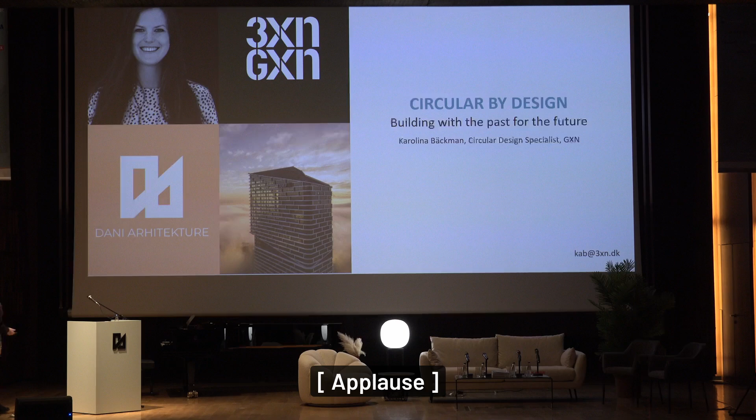And thank you for having me in this beautiful city. It's really nice and it's fantastic to be here as part of this discussion on the very important topic of reuse. My name is Karolina Bäckman. I'm a circular design specialist, but also a schooled architect, and I work for GXN.

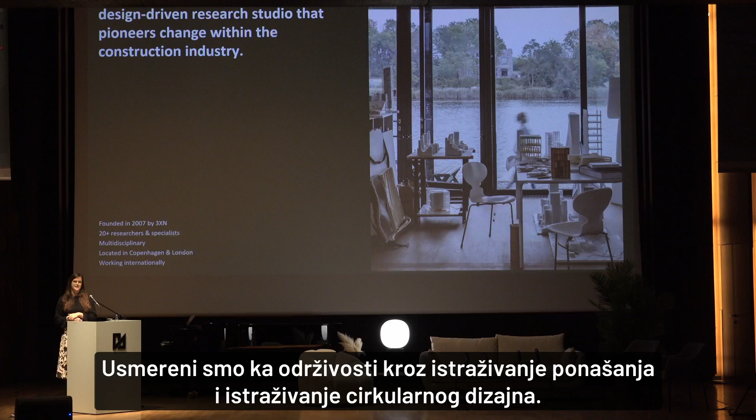GXN is an independent design-driven research studio. We focus on sustainability through both behavioral design research and also circular design research. We have been around for about 15 years. We were founded as part of an architecture company called 3XN, and then we have now spun out in the last few years as an independent company. But we have a very close relationship with 3XN. So we sit under the same roof in this beautiful building in Copenhagen, and together with 3XN, we then explore how we can create unique solutions for very complex problems.

We do this with our offices in Copenhagen, Stockholm, New York, Sydney, London, and Amsterdam, and we work on projects all over the world. What we have, which is very unique, is that we have a collaboration that allows us to do both research and then apply it in practice. So at GXN, we say that we are the geeks, we're the nerds. We do about 40% of our work as research, funded from lots of different institutions. And then about 60% of our work is as sustainability consultants on projects that 3XN is involved in or that other architecture practices are involved in.

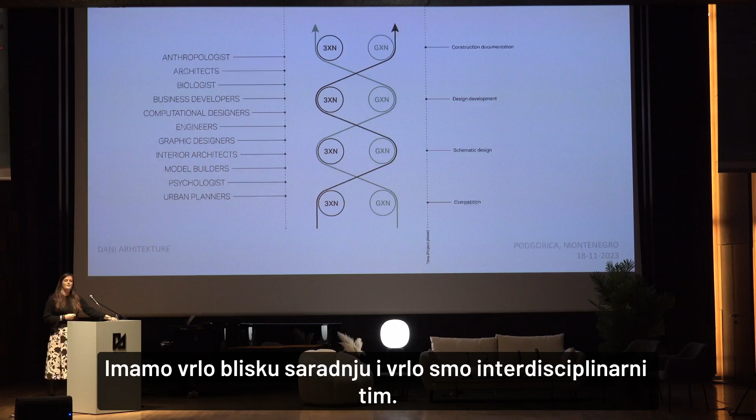So we have this very close collaboration, and we're a very interdisciplinary team. So we work in this flow where we share ideas back and forth throughout all design stages. And we do this on lots of different scales, everything from master plan scales and urban planning down to very much material science. And one of the big areas that we have really been geeking into in the last 15 years is circular design.

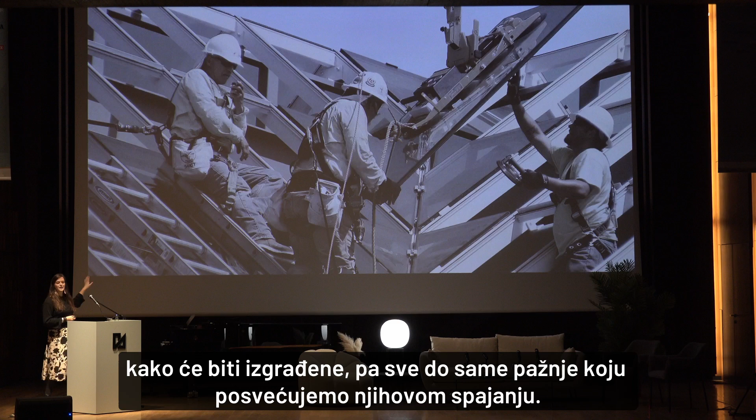What this comes from is really that we're fascinated that when we construct buildings, we take so much care in actually putting them together, both in terms of the energy that goes in from whole design teams to actually design them, plan for how they're going to be constructed, to the very care that we put into actually putting them together. But when it comes to the end of life of buildings, we seem to take absolutely zero care. They just go into a pile and they become waste. And why is it that we waste all of this value and energy that has gone into buildings?

So we did a lot of research on this, and in 2016 we published a book that was called Building a Circular Future, that was looking into how we can actually change this and continue the value of the buildings that we put together. It's still available, you can find it for free online. It's been updated in 2018. And it kind of outlines the basic principles of how we move towards a more circular future. And what we have done since then is looking into how we can apply that in practice.

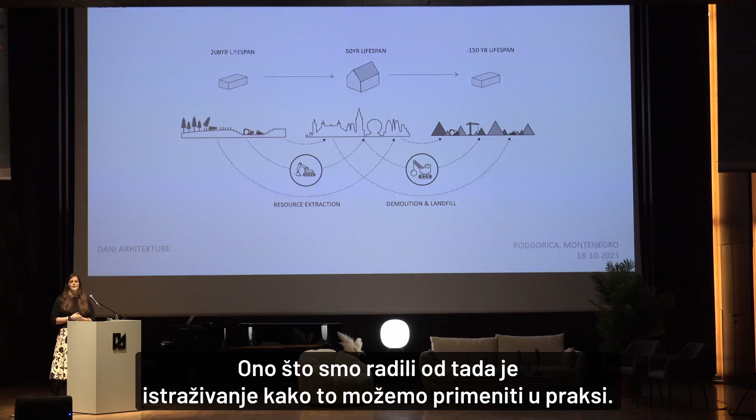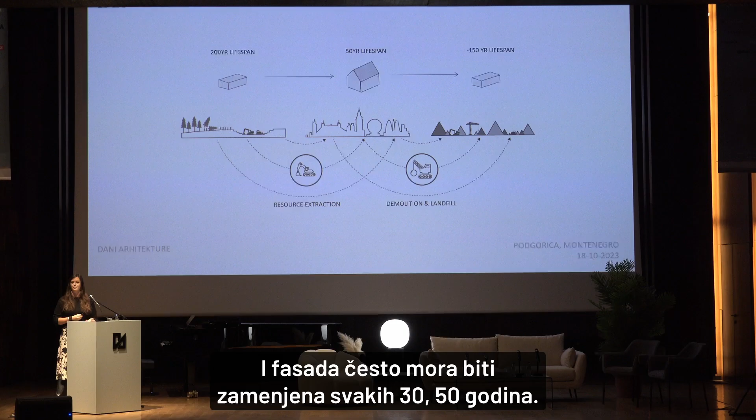So what we really see is that what we're doing at the moment mainly is a linear construction that results in a lot of waste. We extract resources and create building materials like a brick, which should have a technical lifespan of about 200 years. There's brick buildings out there that have been around for much longer than that. But we put them into a building in, say, a facade. And a facade often needs to get replaced every 30, 50 years, which means that the technical lifespan of that brick gets linked to the lifespan of that facade, and suddenly becomes much shorter. At the end of the life of that building or that facade, we then throw that out, which means that we wasted 150 years of a functional lifespan of that brick.

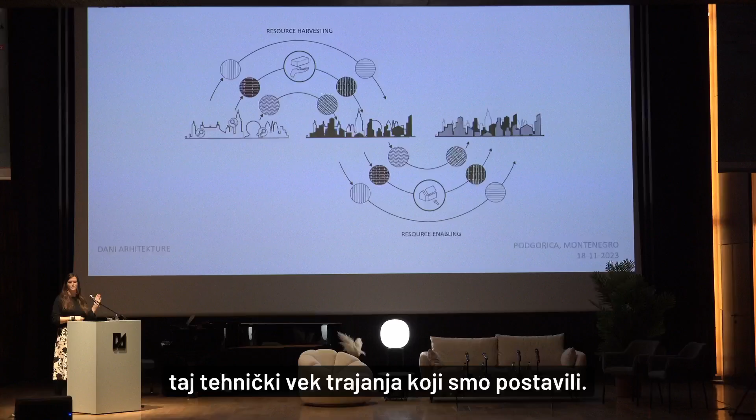What we think we should be doing instead is really looking at how we can harvest resources from the existing environment, making sure that we make the most use of that technical lifespan that we have put in, and then also enable those resources to be harvested in the future as well.

And we think this creates a circular construction economy where we have a constant flow of resources that can either be harvested from existing buildings that might need to change use or have come to the end of life, and then that we design buildings in a way so that we can also then reuse the resources in them in the future. And this is what I'm going to talk about now.

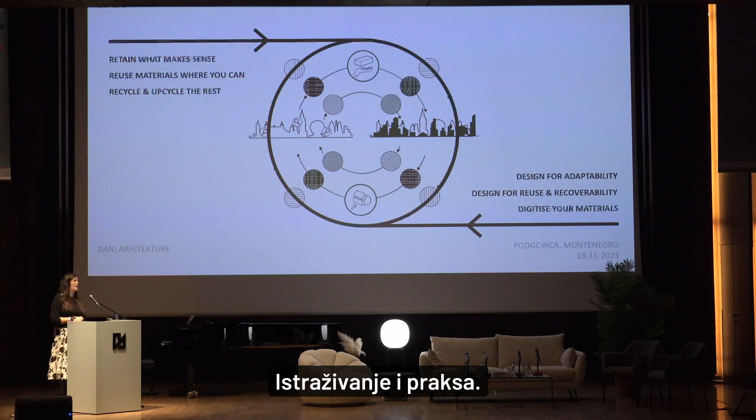Really what I want to show you is a bit behind the scenes of how we work with this, both in research and in practice. And we'll focus on these 6 key points that is the mantra that we apply to all of our projects, which is really about retain what makes sense, reuse materials where you can, and then recycle and upcycle the rest.

Then when we design new buildings, that we design them for change, we design them for reuse and recoverability of materials, and then that we digitize materials will make all of this a lot easier in the future. So starting with retaining what makes sense.

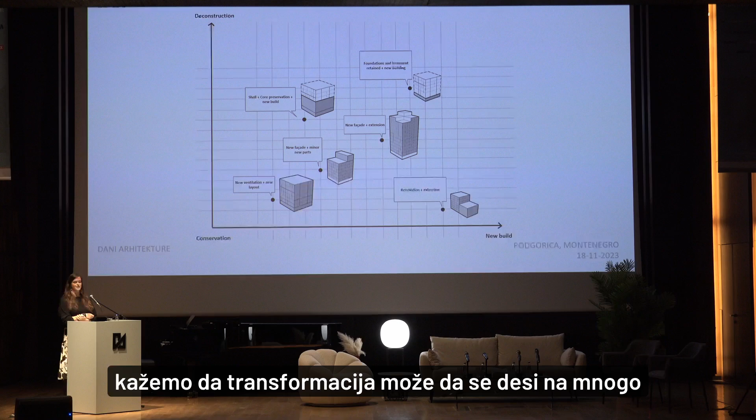We normally use this little axis diagram to say that transformation can happen at lots of different scales. And we approach each project as unique cases. So at the bottom here, we have kind of the full conservation of projects, which stretches to a full new build project. The conservation is normally when we talk about the buildings that we love, that have a strong cultural value, a heritage that we want to preserve.

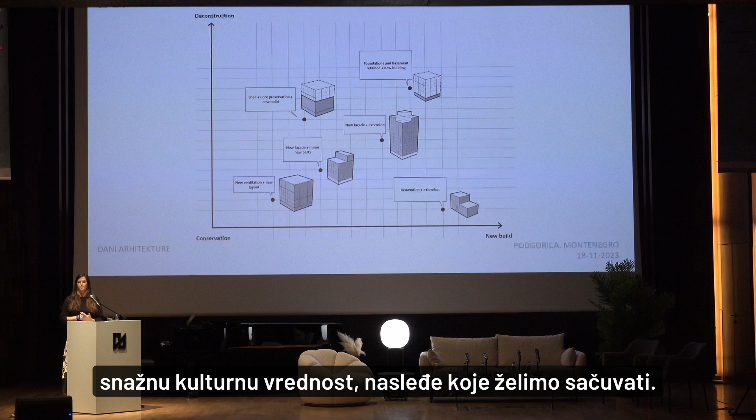But the reality is that we have a lot of buildings that we call unloved. There are buildings that we might want to get rid of because they don't suit users' needs anymore, or they're not as attractive as they were when they were first designed. But they still hold a lot of value.

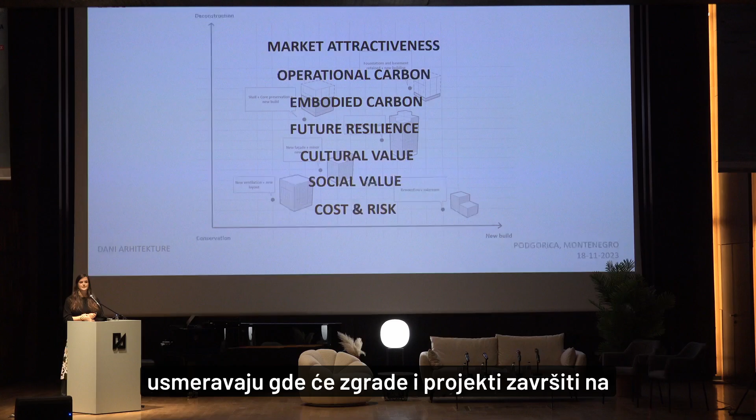So we work on this axis of looking at where can we find a balance between deconstruction and conservation and new build and conservation. And there's lots of different things that drive where buildings and projects land on this axis. It's everything from market attractiveness, the operational carbon, it might need an upgrade, the embodied carbon of keeping the materials, future resilience and adaptability of the building, the cultural and social value, and of course the cost and risk in the market.

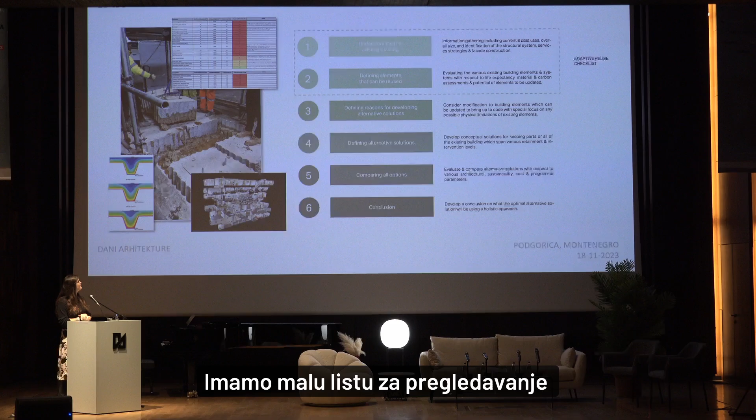So how we approach this is that on every project we conduct what we call a forensic analysis. We go into the very detail of understanding the buildings that are there on site. So we have a little checklist looking at actually understanding the existing building. We do this with a broad team. We do a 3D scan of the building. We look at the structural qualities. We dig holes to test the soil conditions and the pile conditions. We do an analysis of the lifespan of the different building components.

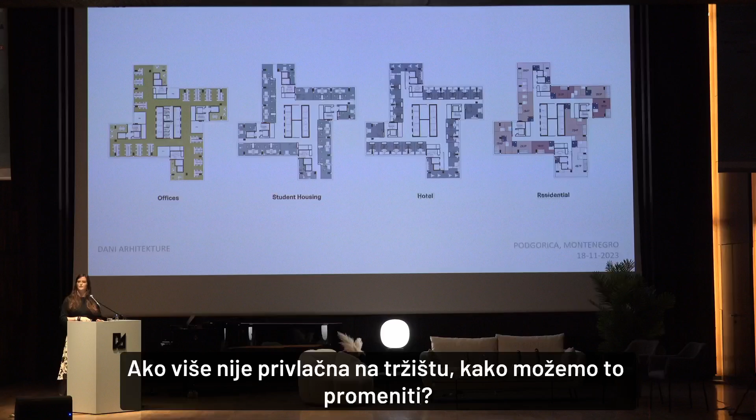And then from that, we look at, okay, this is our baseline. This is the building that we have at the moment. What are the options? What can we do with this if it's no longer attractive in the market? How can we change that? It can be by looking at different uses. It can be looking at fully redeveloping the building.

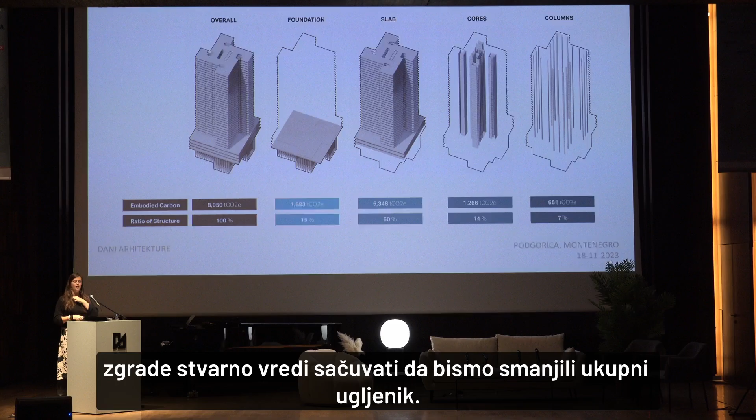We also look at where is the value, and there's lots of different parts of this. It's of course also the social value and the monetary value, but one of the values we also look at is the carbon, the embodied carbon that is in the existing building. So we often do an analysis of where is the majority of that carbon and which parts of the buildings are really worth keeping to try to minimize the overall carbon.

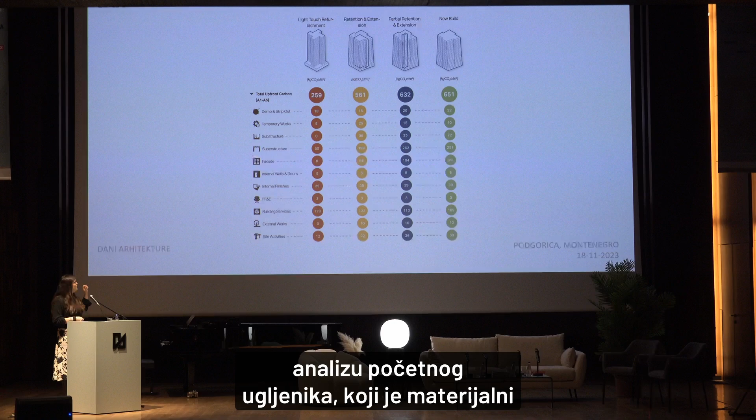We then look at different options to try to realize those use case scenarios that we have identified, and it's a scale again, developing lots of different scenarios that we can then analyze. And one of the important things is obviously that we compare these options across multiple different things. So again, if we talk about carbon, we do an analysis of the upfront carbon, which is the material-related carbon in those buildings when we would redevelop it.

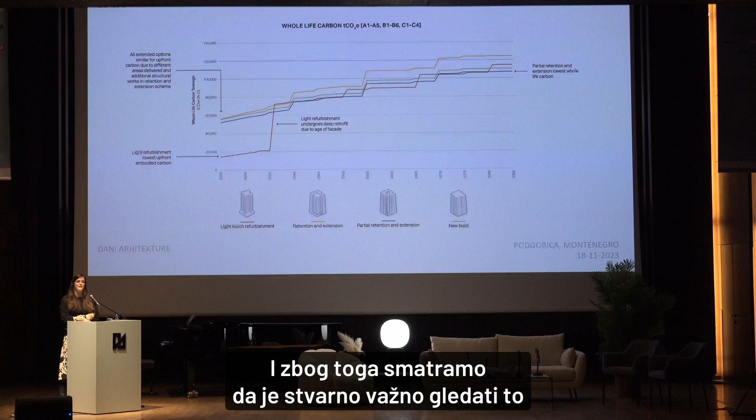And often we see that, of course, the kind of light touch conservation is the one that would result in the least amount of upfront carbon. But sometimes what we also see is by doing that, the whole life carbon might actually be higher because in 10 years' time, we might still need to replace the whole facade to bring that building up to operational carbon standards. And this is why we think it's really important to look at it from a holistic perspective.

And it's not only carbon, it's also all the other topics, but that would result in a 10-hour lecture, so I will not get into that, but very happy to discuss it afterwards. So we have a few projects that have been recently completed that fit very nicely into this diagram. And as you can see, some are very clear.

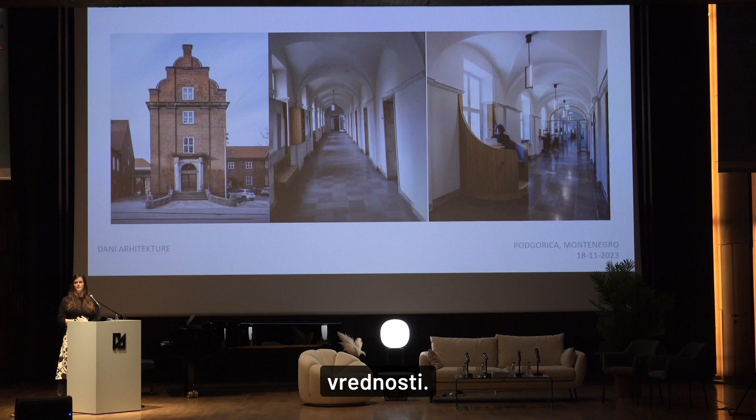An old police house in Denmark having a full internal renovation, but keeping that cultural value of it. A hotel in Greece that had an outdated kind of facade and market attractiveness simply needed a replacement of that facade and an upgrade to the interior, but the structural bones of that building were great, and they can last for another 60, 70, 100 years.

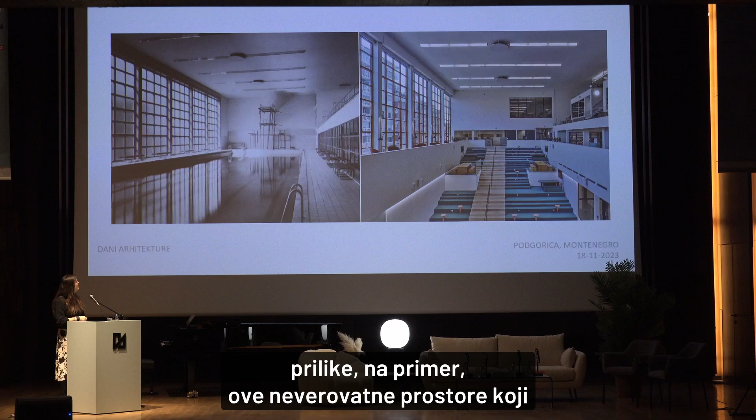An old police school in Sweden that got transformed into a university building, also looking at where we can see opportunities of, for example, these incredible spaces that might not be necessarily still suitable as a pool, but can have other functions like a lecture hall or a library.

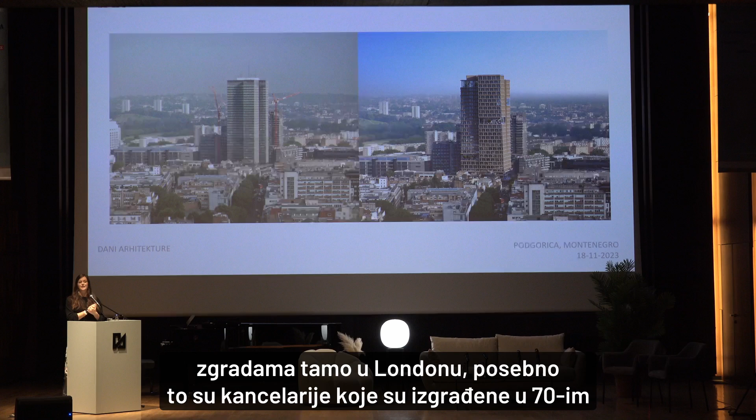And then we also work a lot with what we call some of the unloved buildings. In London in particular, it's offices that have been built in the 70s and 80s. They have quite shallow floor-to-ceiling heights. So according to the office market at the moment, they don't see them as attractive. And these are buildings that should have a much longer lifespan still in them.

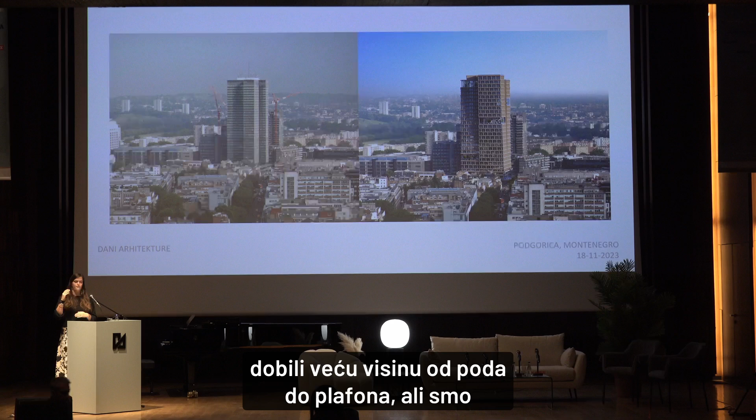And what we look at is how can we redevelop this into something new. And in this case, we had to demolish the actual floor slabs to get a greater floor-to-ceiling height, but we could retain the entire core of the building and the substructure, which was about 40% of the embodied carbon of the existing building.

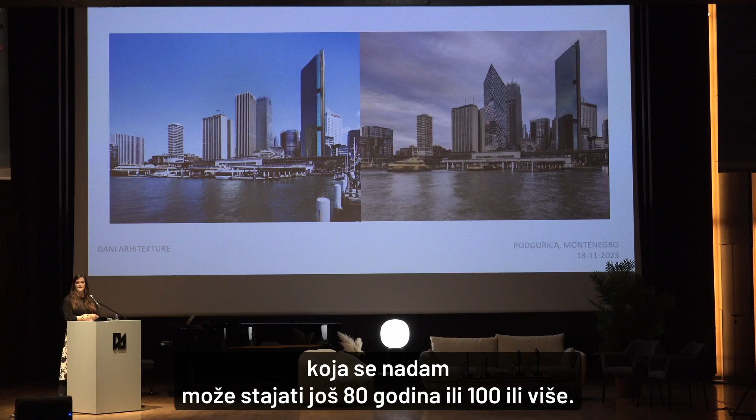And one of our key projects that has recently won a lot of awards, which is very exciting, is Quay Quarter in Sydney, which is taking this building in Sydney Harbour with fantastic views and a fantastic opportunity to become something completely else and a new tower that hopefully can stand for another 80 years or 100 or more. And what we managed to do here was actually to keep 68% of the existing structure. So we stripped off this red bit, kept this core, and then added a core to be able to double the size of the building.

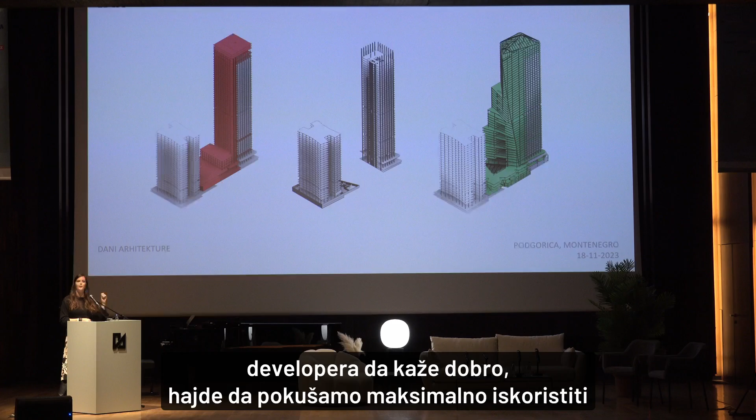This was very much driven by local planning guidelines saying as well that if you did tear down the building, you wouldn't be allowed to build this high again. So it was a great incentive for the developer to say, okay, let's try to make as much use of the existing building as possible. So existing, cut it down, extended the core, and then added a new floor plate. This is a bit what it looks like in the pictures. Obviously a very complex process and required a lot of collaboration with very, very skillful engineers to make this happen.

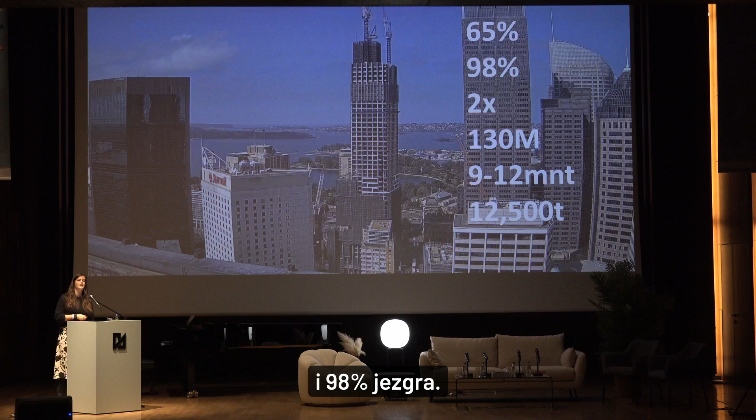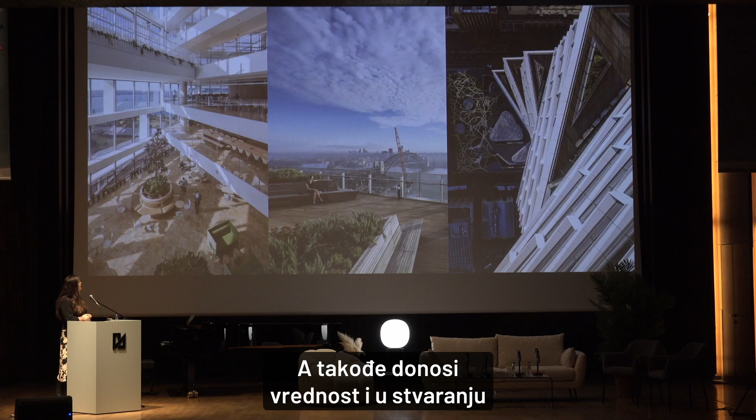But the exciting thing is that we could maintain 65% of the structure, 98% of the core. We doubled the floor size of the building, saved 130 million Australian dollars because we avoided demolition and materials of rebuilding that core. We saved about 9 to 12 months of the program of the building, so it could also be on the market much earlier, and about 12,500 tons of carbon. So it's a great way to show that reuse really can bring value. And it also brings value in terms of creating a new, very attractive office space in Sydney that hopefully will remain attractive for a very long time.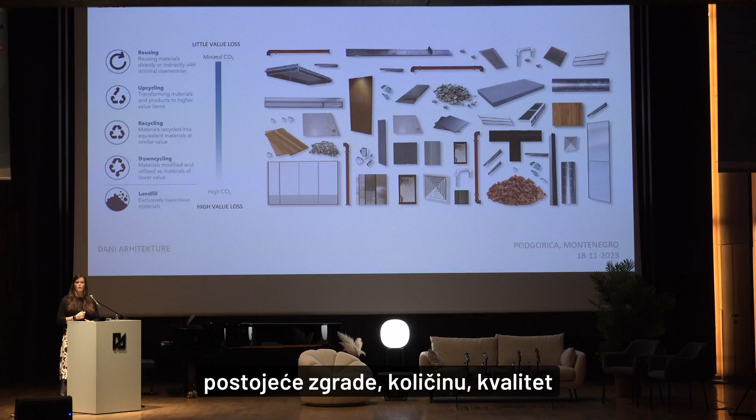When we cannot do this, when we can't keep the majority of materials, we look at, for example, the tower in London, where we only kept the core and the substructure. What do we do with the other materials? They can still be reused, even though they are not retained. So how we approach this is that on all projects we work on, we try to map the materials of the existing buildings, the quantity, the quality of them, and the value they might hold.

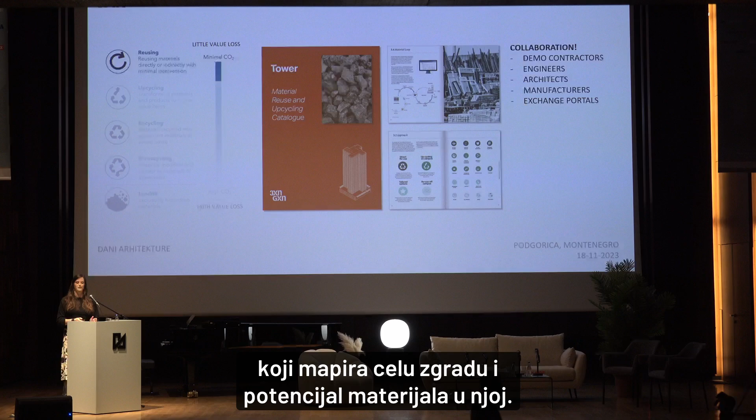And then we work with the waste hierarchy, which means that the higher up we can be here in terms of reusing or upcycling or recycling, we avoid value loss. And further down, we definitely don't want to send materials to landfill. So we try to find solutions to keep them up on this scale, always focusing on reuse first. So for all projects, we create what we call a material reuse and upcycling catalog, which maps the whole building and the potential of the materials in there.

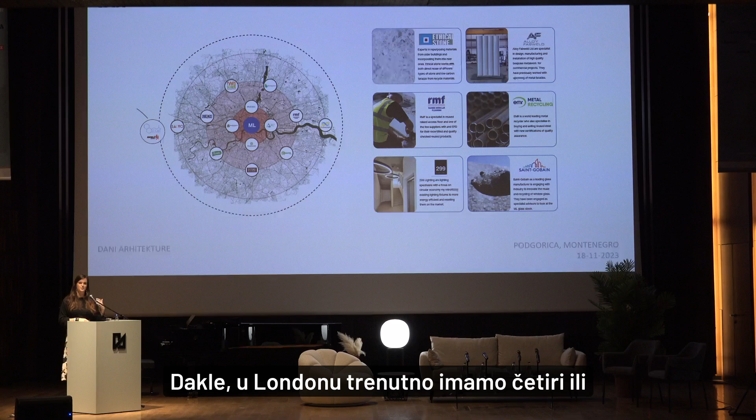It again relies a lot on collaboration, because reuse is not only valuable if it happens on your site or in your building. Reusing of material is really being part of a wider urban ecosystem where material flows can happen across the city. So in London at the moment, we have 4 or 5 projects that have different reuse catalogs, which means that we can build a strong network of manufacturers, material producers who might be interested in these materials.

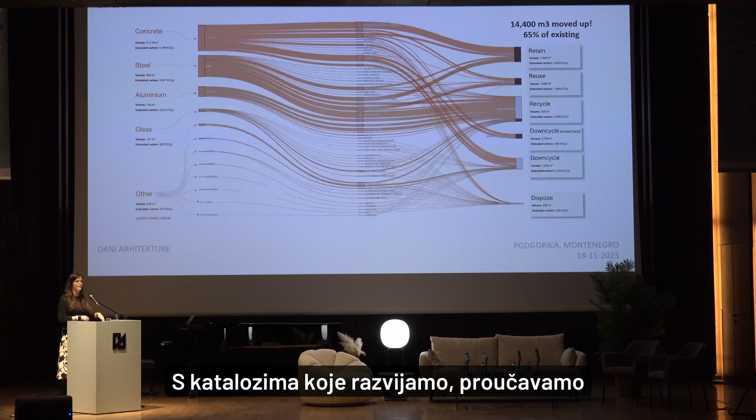And then what we do is we map it, and then we look at this would be the business as usual case in terms of the hierarchy of waste. Where would these materials go? Most often they go to recycling, more often they go to downcycling, which means that they actually lose the value they have, or they get disposed of. With the catalogs that we develop, we look at what are the options to actually retain materials, how can we send them for reuse either on site or off site, and then how can we move them from downcycle to upcycle and from disposal to at least downcycling.

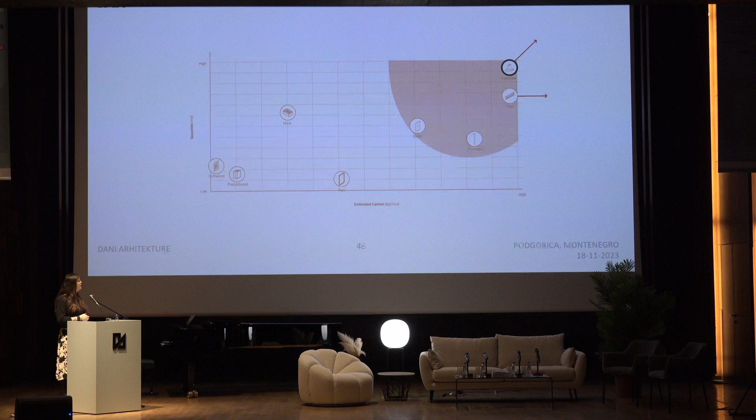So on the Euston Tower, we managed to move about 65% of the existing materials by volume up the waste hierarchy. And that we think is really successful because it saves carbon and it saves monetary value as well. When we look at how to approach these things, we normally target the materials that have the highest embodied carbon and that we also have the highest amounts of. The most common ones are always glass, aluminum, steel, and concrete.

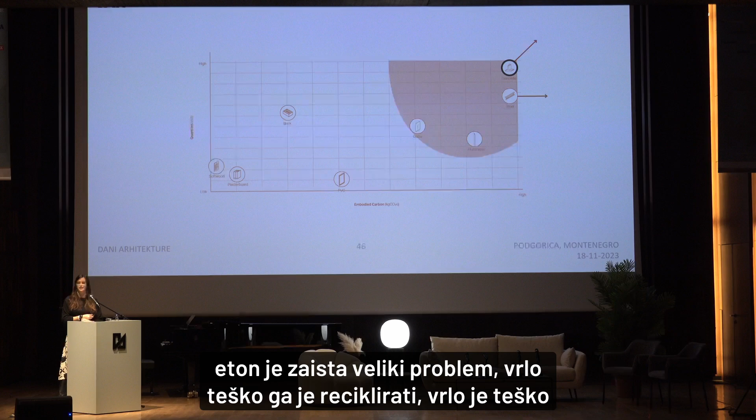Steel has a pretty good reuse story already. It's a scarce resource. We do reuse it quite frequently. Glass and aluminum is more difficult, but they have good recycling cycles. Concrete is a really big issue. It's very difficult to recycle. It's very difficult to reuse. So it's one of the ones where we have gone very geeky and got into research on this. This is how concrete normally ends up. It becomes downcycled into aggregates that go into roads, pavements, but it very rarely goes back into buildings.

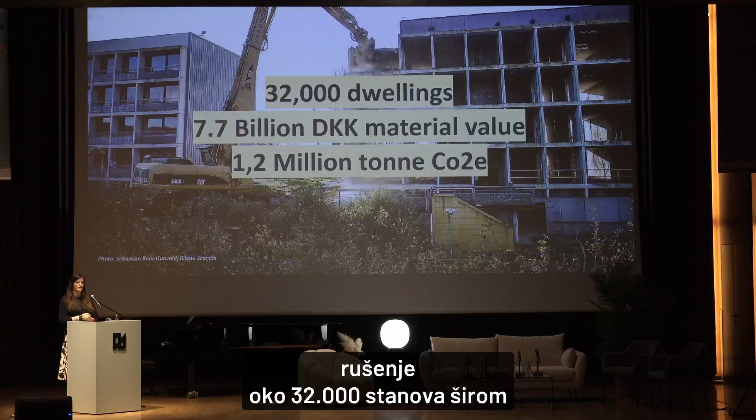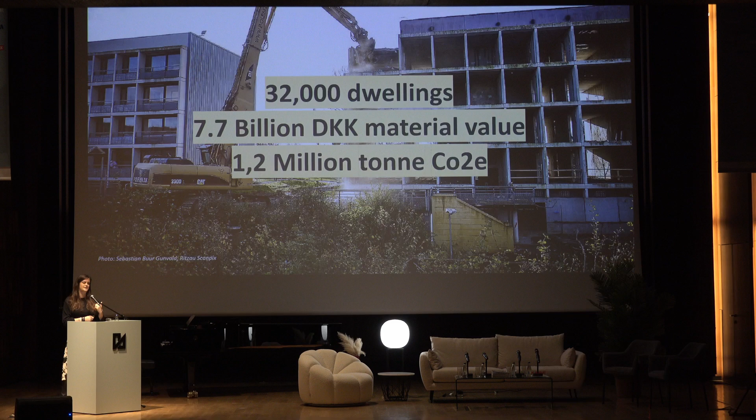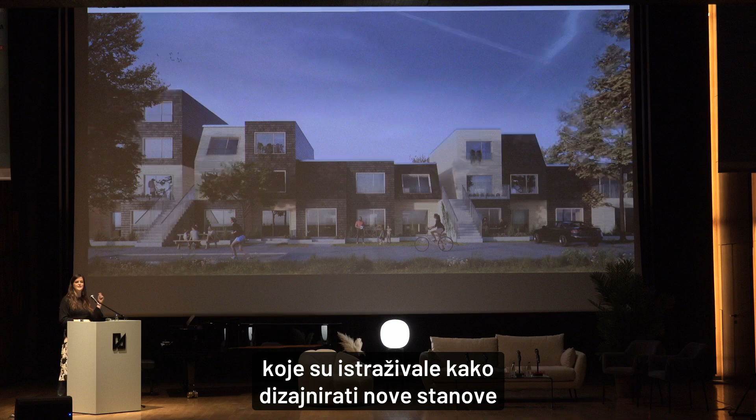So it's looking at, can we take these buildings that are being demolished and look at them as material banks? Most of them are constructed in prefabricated concrete, so all elemental buildings, which should, you would think, make it easy to take those elements apart and maybe reuse them elsewhere. It's not as easy, but we had big ambitions. There were 5 different architecture firms who looked at how could we design new dwellings with the elements from these existing buildings. Having these great images of actually being able to reuse whole elements to build at least 30% of the new buildings. That means also looking into how do you get the concrete elements out.

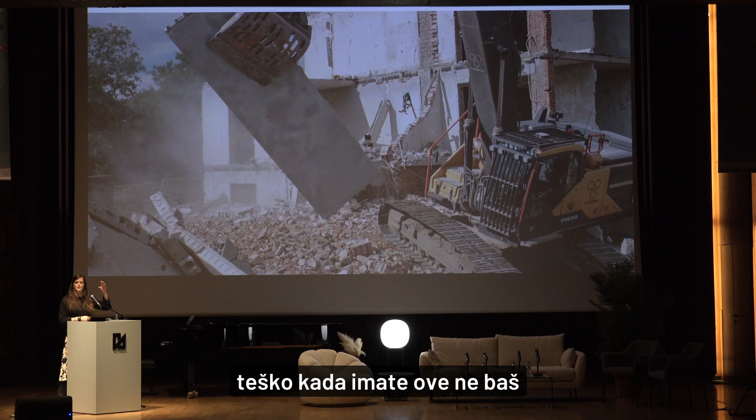It needs quite significant intervention in terms of blade sawing them out from their positions, then trying to carefully lift them out. It's very difficult when you have these not very graceful machines to do that, and each element weighs about 3 tons. And then how do you then lift them from a place to another place without breaking them? It's a research project that's been going on for 4 years, and we're still at a point where it is very difficult to keep those elements in a good enough quality so they can actually be reused. And then all of the elements are tested. They're worked with structural engineers to see what impact different interventions have on the structural quality of the elements once they've been taken out.

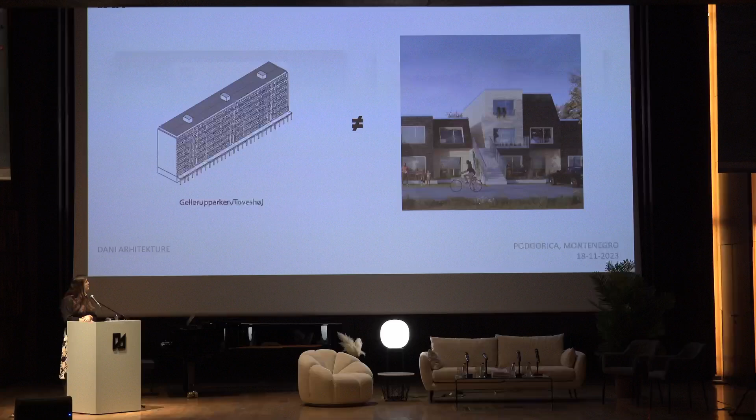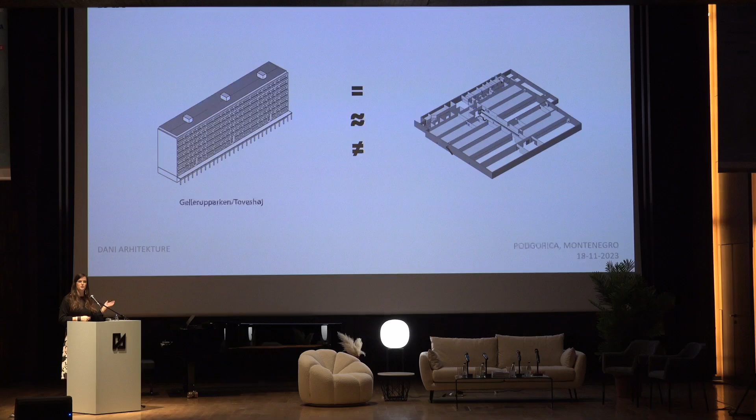So the short conclusion at the moment is that we cannot rebuild with those existing elements. The quality is not there. We don't have a process yet to actually be able to extract them in a way to make it feasible. But what we can do instead is look at maybe they can be resources for something else. Industrial warehouses don't require the same kind of safety guidance as residential buildings, so they are a great way to look at. We have a lot of resources.

In terms of concrete elements, maybe we can start building warehouses in Denmark with these elements instead. So we tested that with a client who is actually from a demolition contractor. They now call themselves a deconstruction contractor. And they wanted to build their new headquarters in an industrial warehouse with only found materials. So great opportunity. We managed to look at how we could take some of those prefabricated elements and actually build the interior for them using them.

It's a very small scale, but this is how we work at GXN. We like testing things at small scales to prove the concept, and then we can push it into projects with the help of 3XN and test them on bigger projects. So that is also now what we're doing on the Euston Tower in London, where we are now investigating also a prefabricated system in the existing tower. We know how much we have, and we are looking at whether we can design the new tower based on similar dimensions and potentially actually reuse some of those slabs in the new building.

This is yet to be confirmed. They are taking out the first panels for testing in a month or so. So we will see. It's obviously groundbreaking. Most likely we will be stopped because of insurance issues or something, but it's great to see that we have developers and we have project teams on board who want to test this. And as long as we can try to test it, we push industry slowly forward.

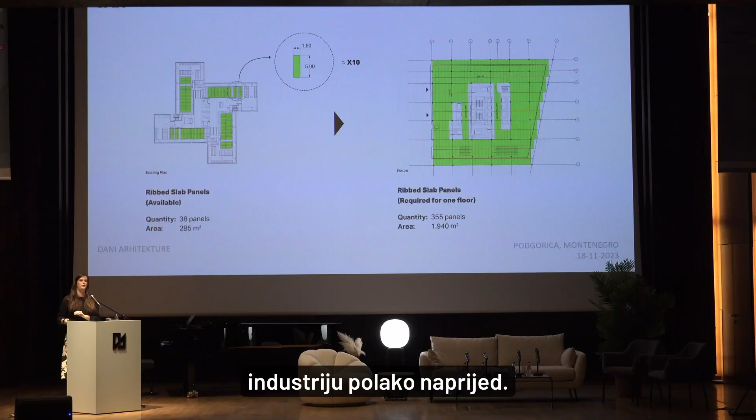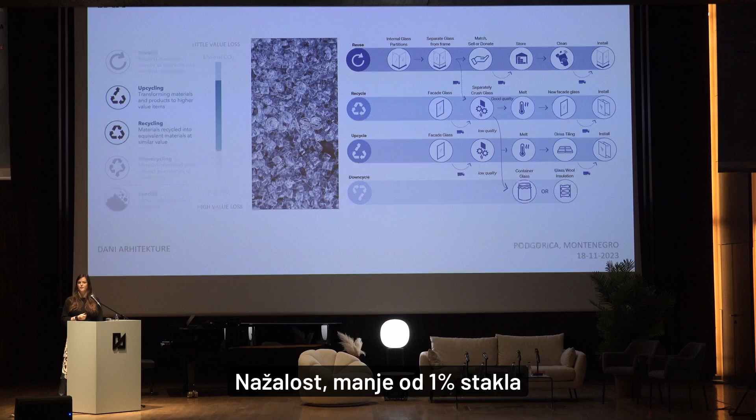Then upcycle and recycle the rest. If we can't reuse building elements, what we look at is keeping them at least in the upcycling or recycling routes. Glass is an excellent example. It's very difficult to reuse directly because it's very fragile, and it costs a lot to take it out very carefully. Recycling glass, especially building glass windows into new windows, would be a fantastic opportunity. Unfortunately, less than 1% of the glass recycling of windows in Europe actually becomes new windows. Mainly it becomes new glass bottles.

So if we can't keep those in the recycling hierarchy, how can we then create a middle layer, which we call upcycling, where instead of sending glass to become glass wool or glass bottles, can we turn it into something else and make it an architectural element in the building? Sorry.

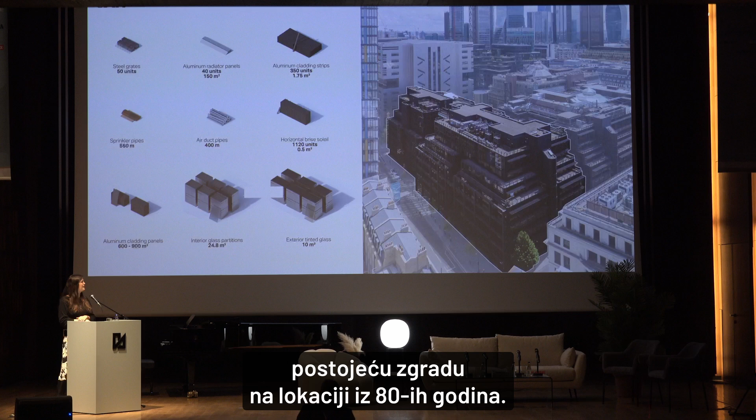So, 2 Finsbury Avenue is what we call an upcycled tower, almost. It's another tower in London that replaced an existing building on the site from the 80s. It's actually 2 buildings. You can see the other one to the right in the image. That one has been fully retrofitted and refurbished into an office, but on this building site, the clients had the opportunity to build a tower to create new office area in London. So this started in 2016, and the decision was that it was very difficult to reuse the existing building. It would have to be demolished.

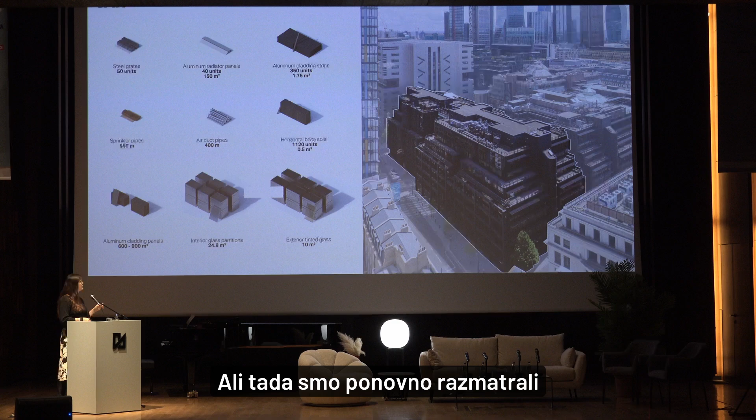But then we were looking again through our material catalog, what can we actually reuse from this building so that those materials don't go to waste. And we created part of this catalog. Of course, parts were sent for reuse. For example, the steel in the building, about 40% of that has actually been reclaimed and sent for reuse elsewhere in London. But there were a lot of other materials that were difficult to reuse.

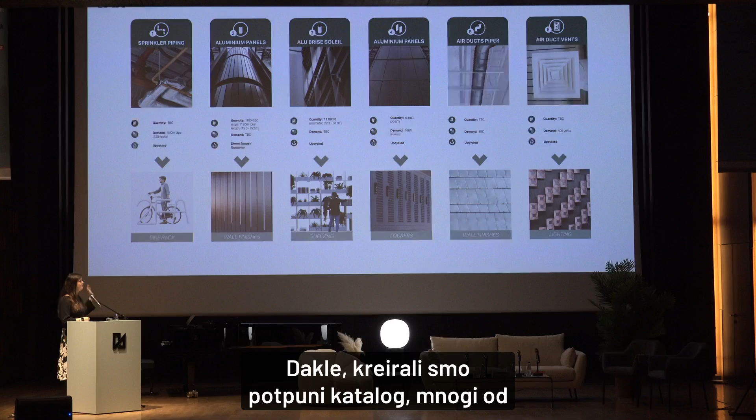For example, the aluminium facade, the air duct pipes, so any building services often go straight to landfill, and air duct vents. So we created a full catalog of the potential of actually turning these materials into, say, internal finishes. Because internal finishes often don't have the same requirements in terms of insurance and quality certifications. So we created a full catalog of different options.

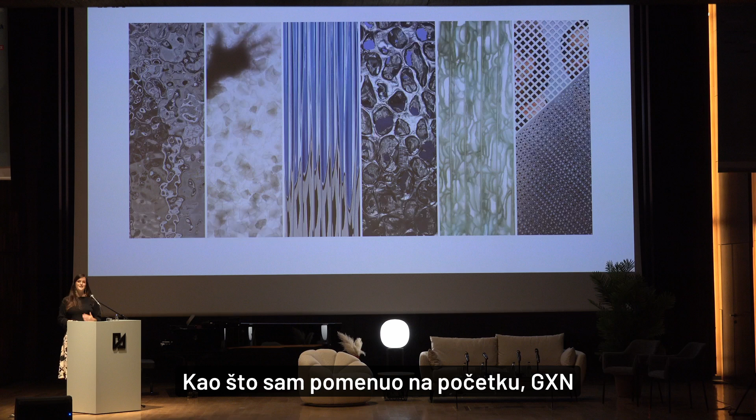Some of them we see also that upcycling and recycling can bring another type of experience to a project. So as I mentioned in the beginning, GXN also focuses a lot on behavioral design, which is about the user experience. And we think it's very interesting where we can use upcycled and reused materials to create that user experience by textures and colors that also reflect the past of the building. We also see it as a learning tool. If we can display upcycled or reused materials, maybe it can also help communicate to the wider public about the wasteful economy we're currently in, but the circular economy that we can be in.

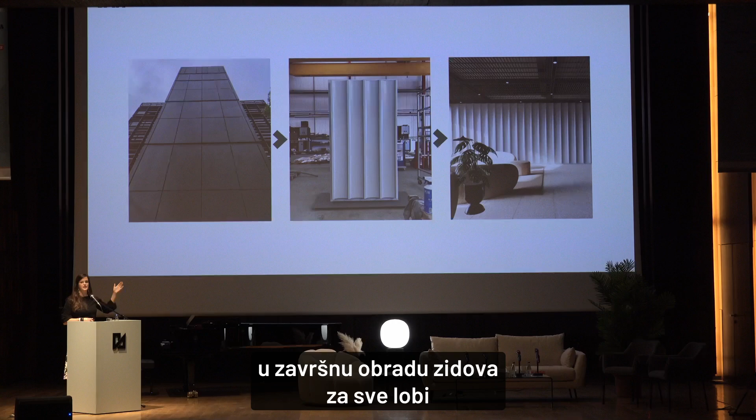So in 2FA, what we have managed to do is actually take the aluminum facade and remanufacture it into the wall finishes for all of the lobby areas and the lift areas in the new building. It looks like a very smooth process. It was definitely not this smooth, but I think my colleague Henry Glugau will talk a bit more about this process in a lecture tomorrow.

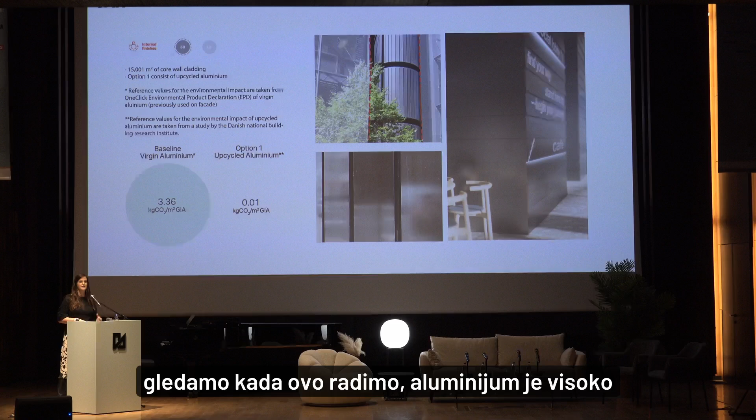But what we look at when we do this is that aluminum is a highly recyclable product. It is very valuable when it gets fully recycled as well. So when we look at these opportunities, we also make sure that we don't waste any of that value of recycling the aluminum when we try to reuse it instead. But in 2FA, it showed that it was a good benefit for the project. We brought down the embodied carbon of the interior finishes by quite a lot by reusing the aluminum from the facades.

And a short point I want to make on glass is just to encourage everyone to look at how we can recycle glass more. Because as I said, less than 1% of windows actually gets recycled into new windows. It's really wasteful, so we always use virgin materials when we produce new windows. And the reason for this is because the way that we laminate and coat glass makes it very difficult to recycle it and get the high-grade cullets that we need to be able to create new windows.

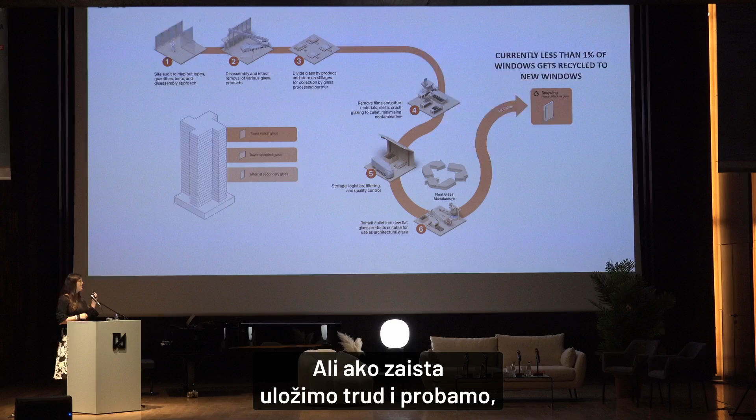But if we do take the time and we really try to do this, there are significant savings, both in terms of money when we in the future have more resource scarcity, but also in terms of trying to reduce carbon in the glass industry. So wherever you can, try to send glass for recycling.

I hope I'm okay for time.

But to talk a little bit about when we design new buildings. Obviously, what we want to do is try to reuse as much from the existing, but when we design new buildings, we also want to make sure that it's easy to reuse them in the future. And the first point of that is to design for change. So going back to the social housing blocks built around Denmark, they were once very loved buildings, very functional buildings. But today, unfortunately, they are not anymore, and that is why the government thinks they need a change.

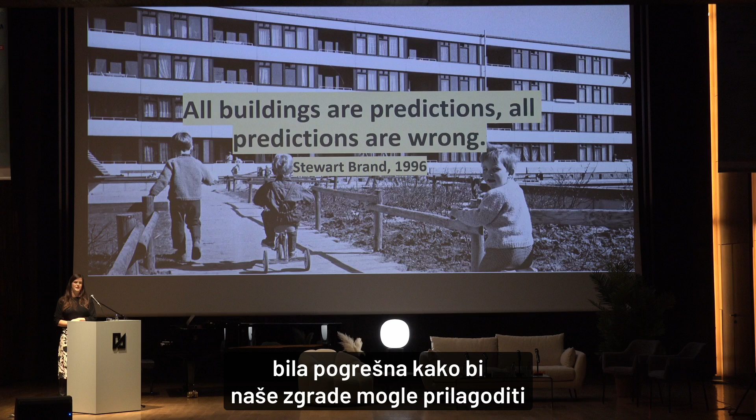And we always go back to this quote from Stewart Brand at GXN, that all buildings are predictions, and all predictions are wrong. So we need to design for our predictions to be wrong, and for our buildings to be able to adapt and change in the future. So we don't want to see this happening again. We should never demolish 32,000 apartments to replace them with new apartments. We should build new apartments that can then be adapted and change typology for different family sizes as the needs change.

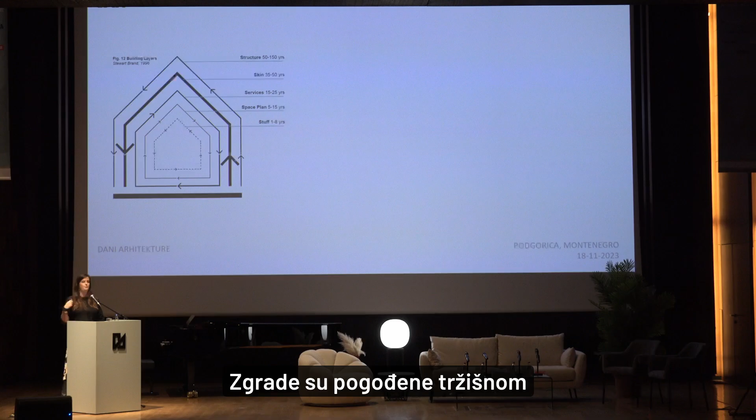And we think it's very important to do that by looking at Stewart Brand's concept of designing for layers. A building has different layers that all have different lifespans. And the reason they have different lifespans is because they're impacted by different types of change. Buildings are impacted by market change, climate change, regulation change, lots of things that will have different impacts on these layers. So we need to try to design each of these layers so that they can be replaced and changed independently.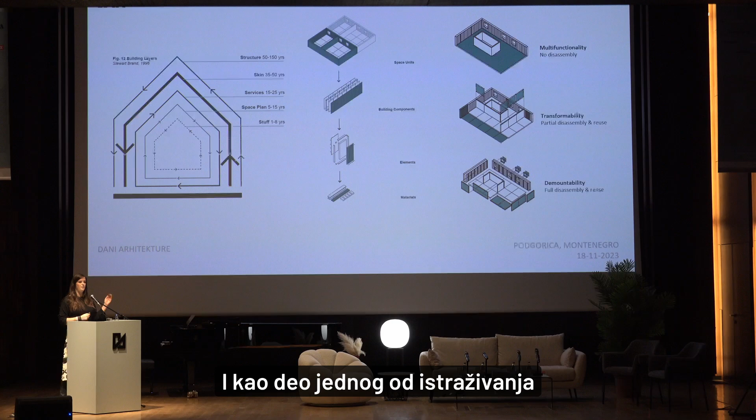These changes also impact different parts of the building: the space units and the types of space we need, the building components, the elements, down to the very materials. And as part of one of the research projects we're working on, an EU-funded research project called Circuit, we're looking at how this applies. There's a spectrum of adaptability, we call it.

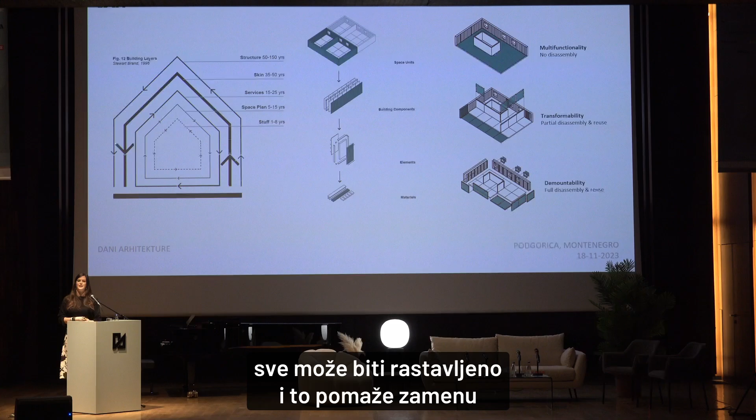So we can either work with multifunctionality, meaning nothing has to be disassembled, but a space is designed to be multifunctional. We can look at transformability, where parts of the space might be able to transform to host different needs, but the external stays the same. And then demountability, where everything can be taken apart and it helps replacement and maintenance.

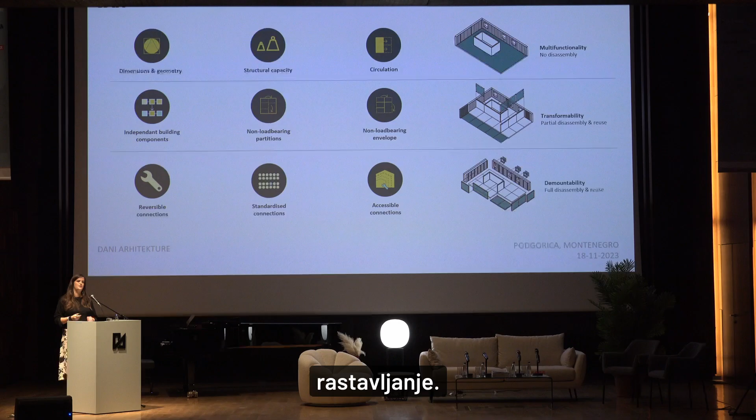And some core ideas around this: for multifunctionality, it's about designing in load capacities, massing, and circulation that suit different needs. For transformability, it's about not having load-bearing partitions and not load-bearing facades, which might take down a whole structure if the facade needs to be replaced. And demountability is about reversible connections and accessible connections to make it easy to take things apart.

But all of this comes at a cost. So we think that every project, again, is unique. Like we said, it's very difficult to predict the future. We can't.

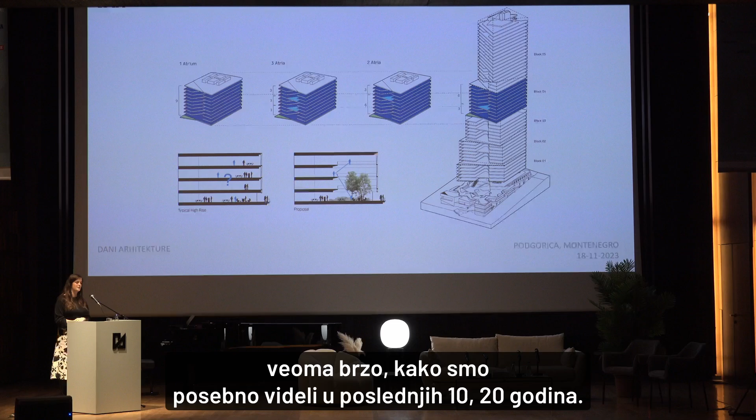And all of these different approaches to designing for change do come with a carbon cost and material investment. So we need to try to think about what are the probable, plausible, and possible futures that we should be designing for. And one way we approached this was again at QQT in Sydney, where the idea was to create villages for office workers. And also thinking that the way we work in offices changed very dramatically, very quickly, as we've especially seen in the last 10, 20 years.

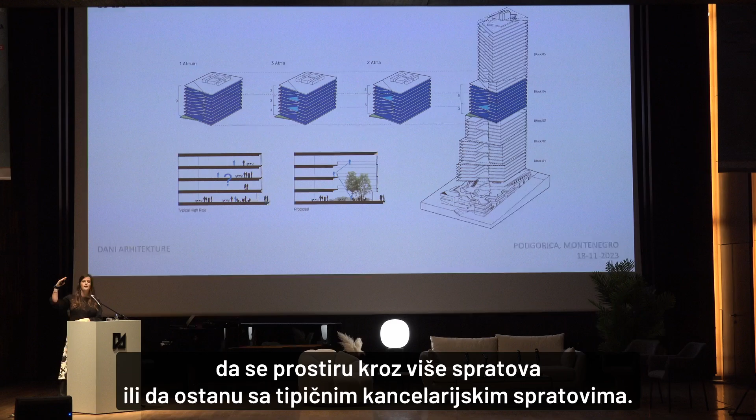So for QQT, the idea was to enable different types of tenants to be able to inhabit this building and for the building to suit their different needs. And then we were looking at creating these demountable floors, which would allow tenants to either span across multiple stories or to just stay within typical office floors. It also means that they could increase the circulation, they could bring materials in this way. So there's lots of different possible functions.

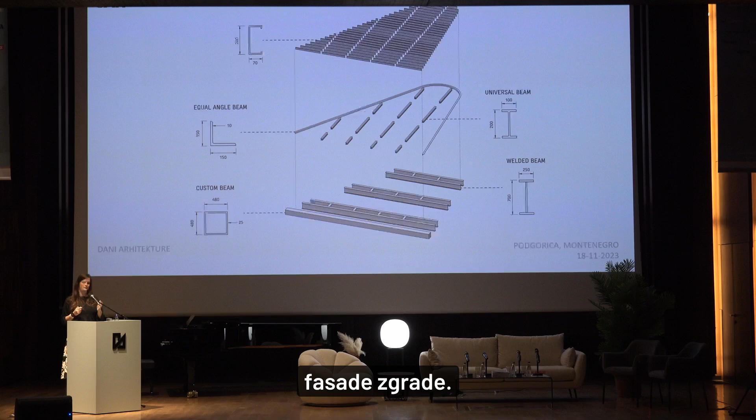So we did this by building in this demountable floor. And the whole idea there was for all of those floors to be fully disassembled from the rest of the structure and for you to be able to do this without actually taking off the facade of the building. So this means also thinking about how do you get those materials out from the tower. So designing each of those elements to actually fit in a service core so that they can be removed from inside the building without having to add anything new.

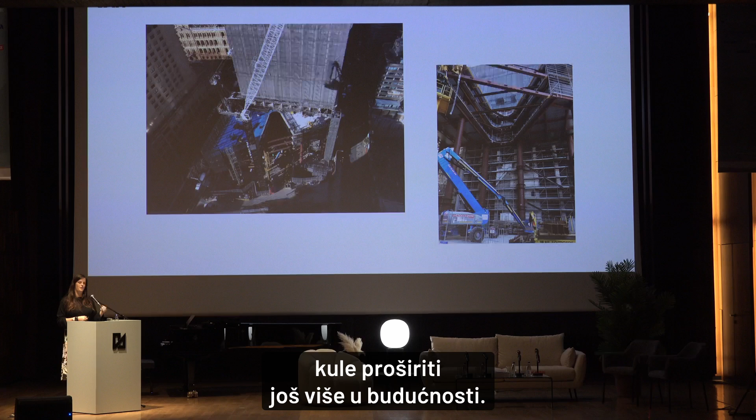And this is what it looks like when it was constructed, and it now allows for that future adaptability, which hopefully will make this new tower, or this extended life of the previous tower, be extended even further in the future. Then we look at design for reuse and recoverability, and this will be a short one, but it's more about looking at the materials, the lifespan, the standardization of connections and elements, and then the deconstruction possibilities of buildings. At 2 Finsbury Avenue, this was something we really wanted to investigate, to look at how do we avoid not learning anything from the past.

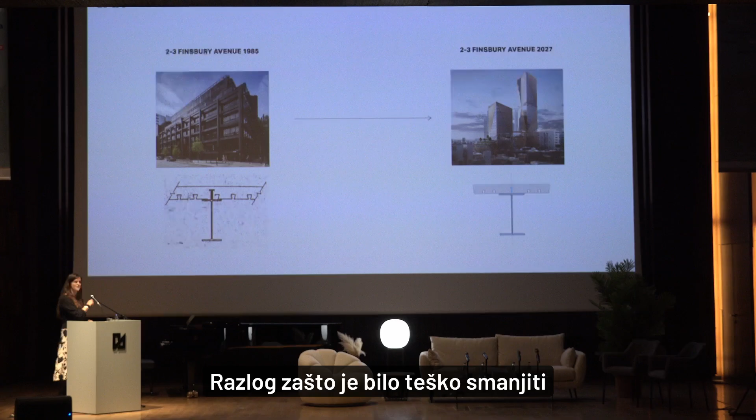So the reason why it was difficult to reuse a lot of the steel from the existing building was because it had a composite floor deck construction of concrete poured into a metal deck connected to a steel beam. And these little bolts here make it very difficult to reuse the steel beams, because to get this concrete off, you have to pull off the concrete decking, which means that the steel beams get bent. A lot of them ended up in skips like this.

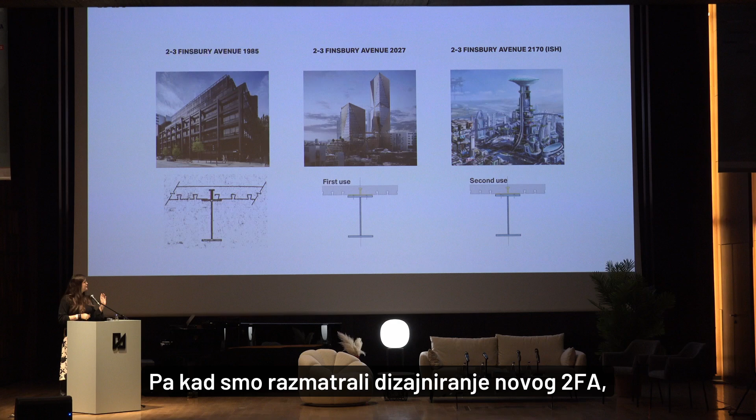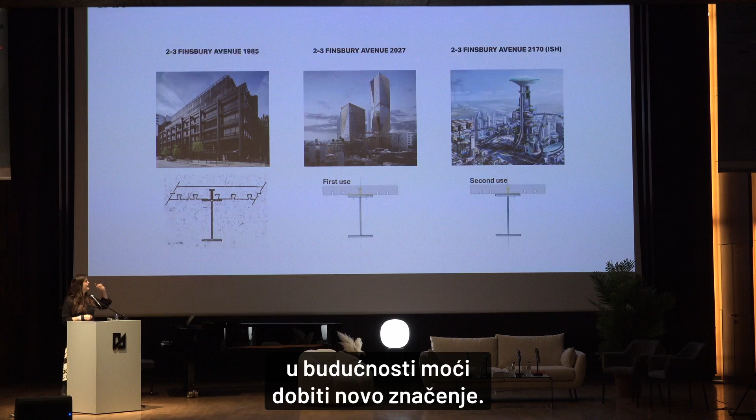So when we looked at designing the new 2FA, we wanted to see a small intervention of just bringing in a separate steel plate that then had 2 separate bolts connected, which meant that we could actually lift out the whole metal deck without having to bend or pull on the steel beam. So keeping a lot more of the steel beams in the new building reusable in the future as well, hopefully meaning that the 2FA that is in construction right now can turn into something else in the future.

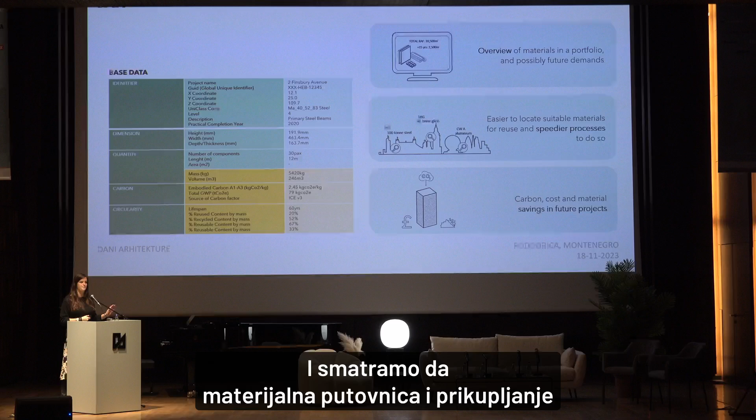And the very last thing is to map your materials. So when we do these reuse and upcycling catalogs, we rely so much on the data that is available on the buildings that we investigate. And we think that material passports and collecting information about the materials that we put into buildings now is really important to make the process much easier in the future.

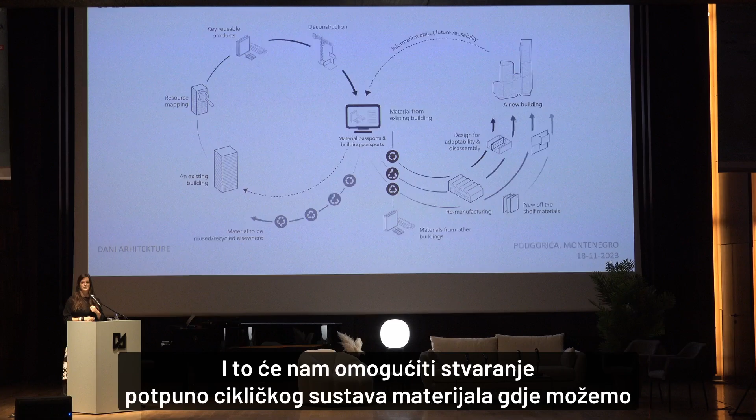So we're starting to look at some key data that we think should be collected for all projects and then saved either in a digital model or even just in an Excel sheet to make it easier for someone in the future to look: what do we have, what is the quality of it, and what can we do with it? And that will enable us to create a fully circular system of materials where we can constantly recycle and reuse materials in a closed loop. So it brings us back to our circular system with the key strategies.

And the key things that I would like to share that I think are important to making this happen is that we need to collaborate across disciplines. And we need to talk to people that we don't normally talk to, like the demolition contractors, way before we even start looking at demolishing a building. We need to allow time to actually invest in this, and we need to test and scale and always push for innovation on projects. And that was it.